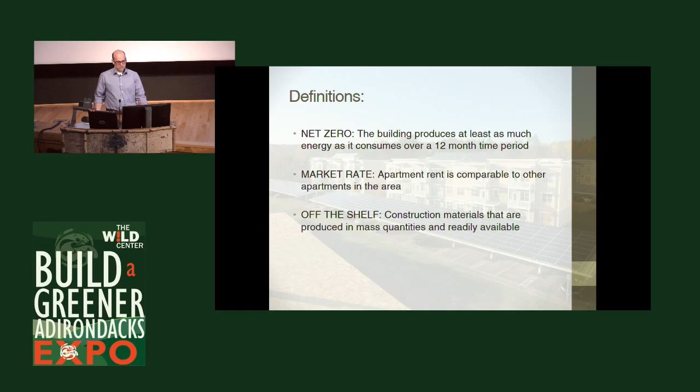So first of all, some of you likely know what these things are, but net zero simply is a building that produces at least as much energy as it consumes over a 12-month period. And that was one of the goals that we'll get to. Market rate is an important term too, because we talked about doing net zero 6 years ago when we did a single family home. Market rate means an apartment, which these are, rents comparable to other apartments in the area.

So if you're in the Schenectady area right now and you want to find a 1-bedroom or 2-bedroom apartment, you can rent at Net Zero Village, or you can rent at another apartment, the new development that went up last year. At Net Zero Village, all the utilities are included - you'll pay the same amount of money, so you're not paying a premium. Some people may choose to live there because it's a green project, but there's lots of people there that are just moving there because they'd rather live there than anywhere else, and it's market rate.

Another term, and I'm not sure this is actually an official term, is off the shelf. Most people know what that is, but it's really important for this presentation, because in order to achieve it, we needed to use construction materials that are produced in mass quantities and readily available. It drives the price down - when you start getting off into specialized areas, things get more expensive, more complicated.

So the first goal was from the developer, the client, David Bruns of Bruns Realty Group, who wanted to demonstrate that market rate, net zero multifamily development is commercially viable in the Northeast. So it's all good to be good for the environment, but if we can make money being good for the environment, now we're really getting somewhere.

And the team's goal was to create a successful and profitable development for the client, and also to develop a process that could be used on future projects, so that this can be replicated.

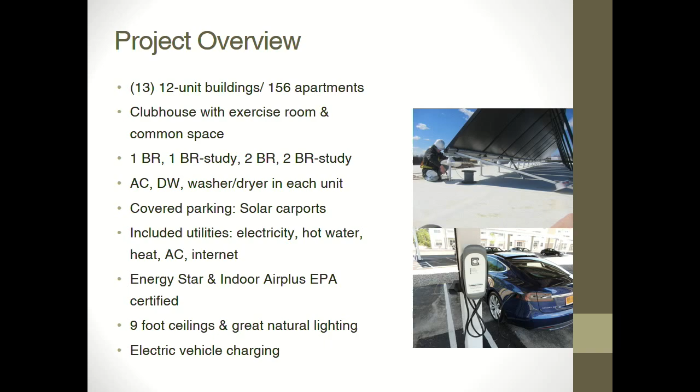The carports are actually where we're producing all of our power with the PV. And when you rent here, you get your electric, hot water, heat, air conditioning, and internet included - none of those bills. You just move in for one price, and that's part of the package. A lot of people like that, the simplicity of that situation. I would love that, personally.

It meets Energy Star and Indoor Air Plus standards. There's also something architecturally - I wasn't the architect on this, I worked with the architect Harris Sanders out of Albany, but they did a really great job. It has 9-foot ceilings, you'll see the daylighting which relates to energy, and there's electric vehicle charging.

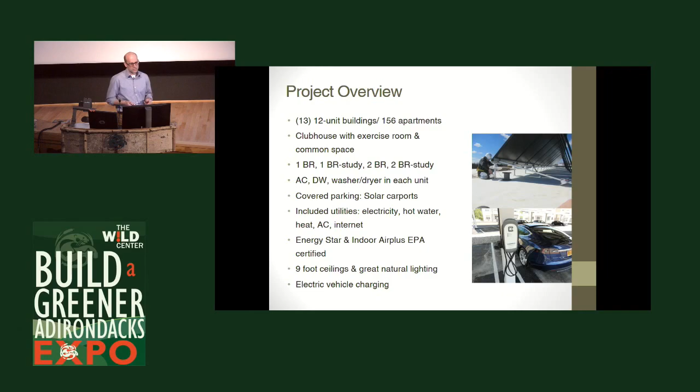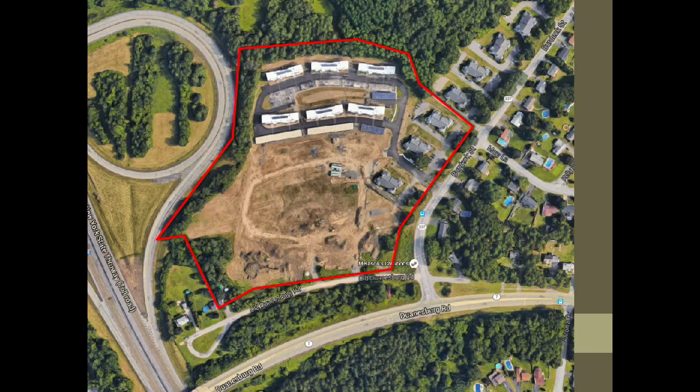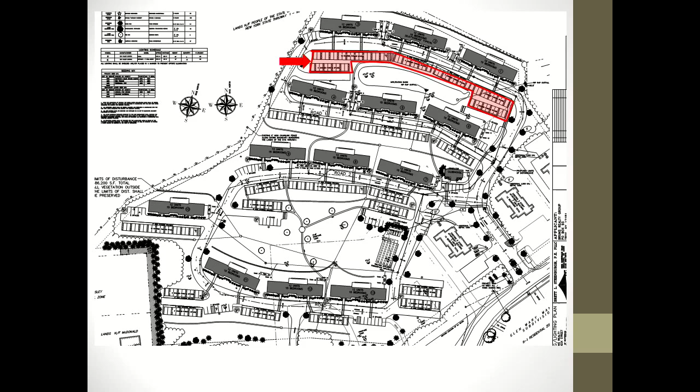This is the site plan. The last slide I showed was these 6 buildings, and you can see the carports, all covered with PV, which we'll get to. So all these areas here are carports and PV, which relates to the net zero aspect.

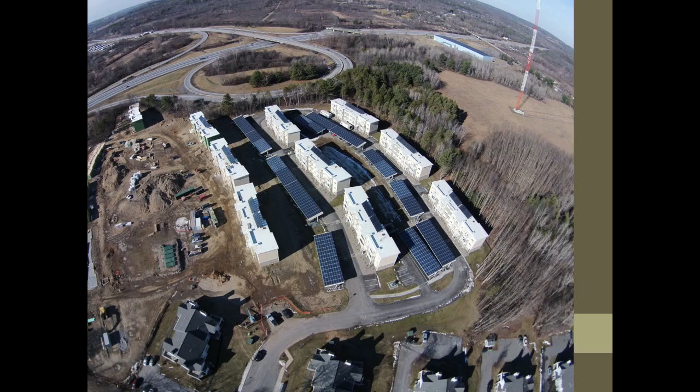Leave this slide up for just a second - you can see that interchange, and again, the first 6 buildings. This is 2 phases; the second phase is on the bottom of the screen, the first 3 buildings, and you can see 1 in the back. What's interesting about this slide is these buildings went up one after another - it started here, went to here, then there was a little lag, and we started here. You can see this one has panels and siding, this one doesn't, and this end is just a slab. So it's a completely different scale and approach than a single-family home.

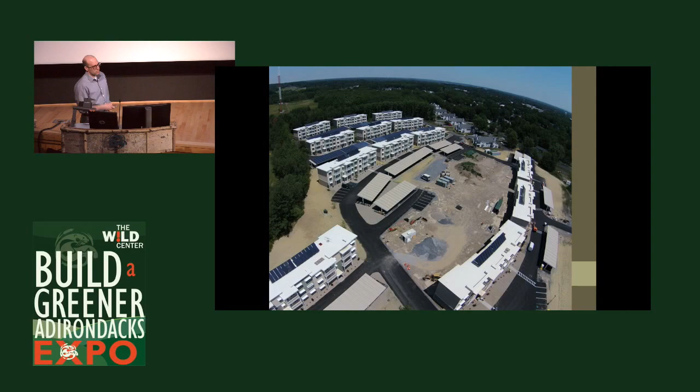A few more pictures - this is later on in the project, showing the whole thing. All the stormwater is handled on site here due to DEC regulations. I'll get into more specifics, but you can start to pick out the solar thermal panels on the roof, the PV on the carports, and some of the shading. This is facing south.

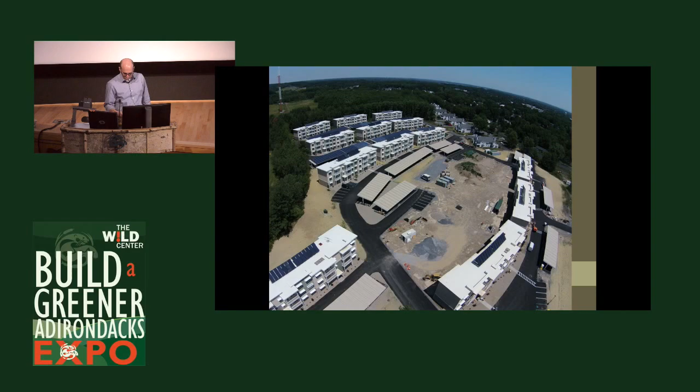Another picture here, as I'm going to zoom in - I'm going to start high and we're going to get into the apartments and start talking about some of those features. This, again, you can just start to see the character of the building development.

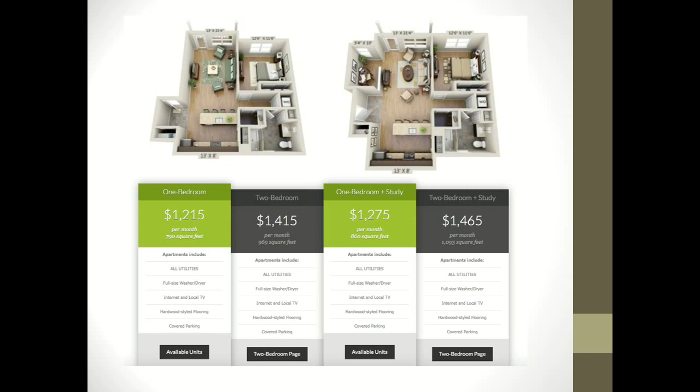So getting back to the market rate aspect, I'm not an expert in what it costs to rent in Schenectady, but this is off their website currently. So this is what it costs. I have one more blow up of these rooms, but this is kind of what you're providing for someone.

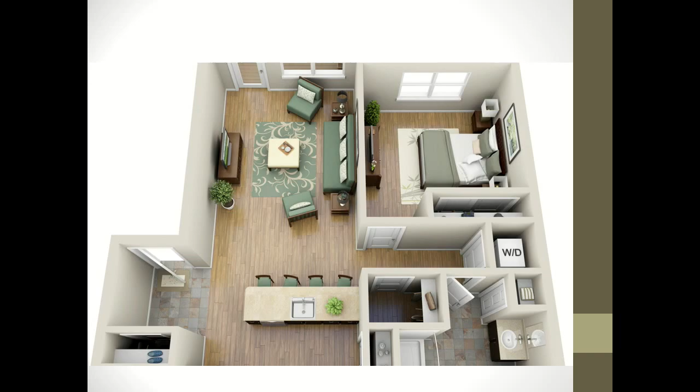This is a 3D rendering, and this way is south with the windows going this way. You have a living room, a bedroom, closet, washer dryer, sink, a peninsula kitchen, and a basic kitchen. I'm not going to show you all the units, but there's 2-bedrooms, 1-bedrooms, different versions. This is what we're doing for people at a mass scale.

One thing I've learned from this project is that when you get bigger, the dynamics change a little bit. Some of this stuff becomes less important at this scale, but we're working on a double-loaded corridor version of something like this. When you get into bigger, commercial buildings, it's really about air conditioning versus heat. This building doesn't hit that tipping point, but when you get a little bigger than this, you start to get there.

I mean, I could point to a couple features, but it doesn't look net zero. There's not necessarily—that's not the point. The point is that it is the rate that we're doing it.

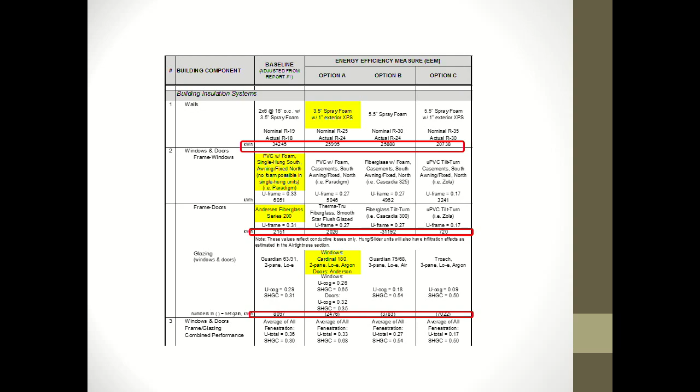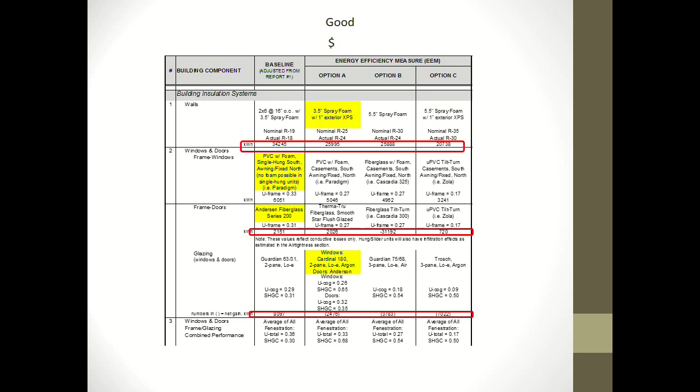So what we did is this Excel spreadsheet output—we went through good, better, best options. Don't strain your eyes on this, but you can see every aspect of the building, every aspect shown in kilowatts. For the walls, from this wall assembly, we determined we're going to have to provide 34,000 kilowatt hours. If we go to this one, 25,000, and down the line the contractor can price this and say, well, I can buy solar panels at this price—I'd rather buy a solar panel. So that was the real light bulb of this project, how to do this market rate.

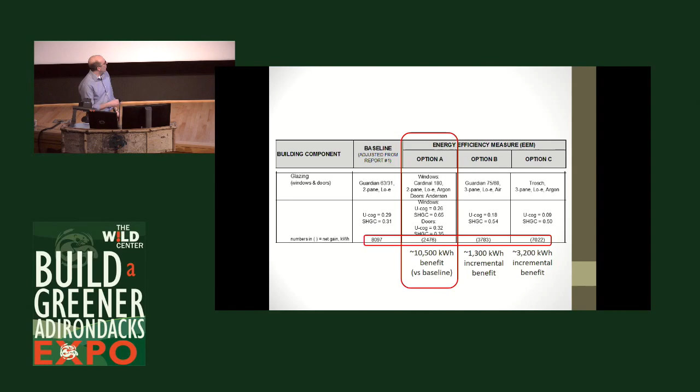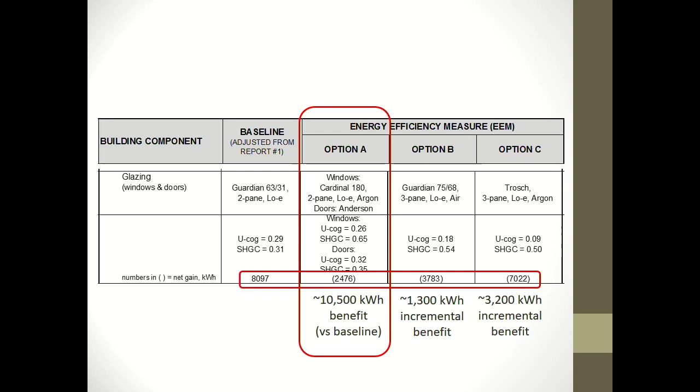We had to use real information to make informed decisions. Windows are another example. Going from this one to this one, you have a 10,000 kilowatt hour gain. Going further, the incremental savings get less and less, and you find the price point that makes sense, then we look at all the other issues that go into a building.

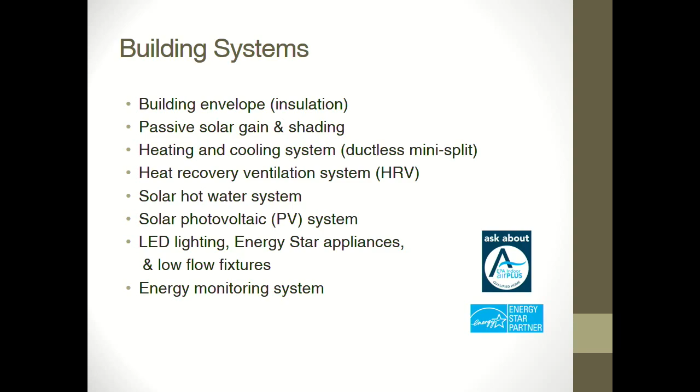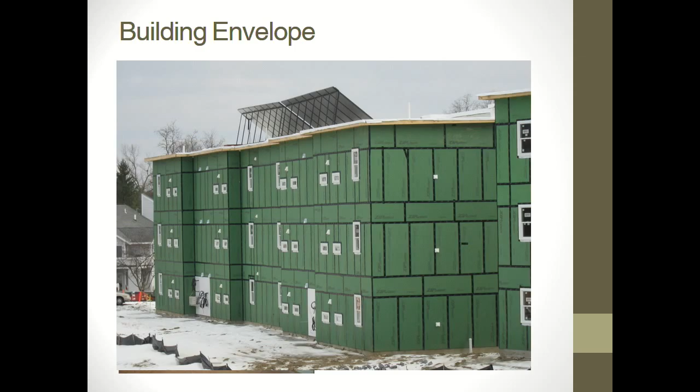I'm going to leave this slide up for just a minute. This is the north side of the building—you can see those kitchen windows for each of these apartments. And you notice the zip system, which you've probably all seen used around. What's nice—and the reason we used it on this project, again there's no good product or bad product, it's about when you apply it.

But really, the other thing about doing this market rate is, as an architect or designer, I get plenty of complicated details, and on a higher-end project there are reasons to do it and you can get it done. On this project we didn't want to scare the framing subcontractor or the insulator—it looks really different, not that it can't be done. On a high-end residential house, that can be done, but on this scale we had the subcontractors bid to the GC on construction costs. They needed to look at it and say, yeah, I've done 2x6 stud walls, that's what we do all the time. We don't put an inch of this foam plywood system on the outside, but I know how long it takes to put up a piece of plywood—it's just a different piece of plywood, not a big deal. So that's the approach we had to take through the whole building.

That gets into the off-the-shelf aspects of things.

Another thing to note on this—alright, laser—notice this detail up here, I'm going to get back to this. This building was extremely airtight, but you'll see some stuff with this detail at the roof.

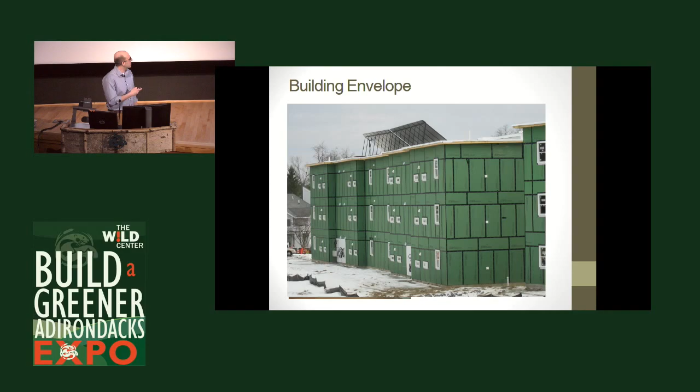This architectural drawing is long on the east-west axis. You can see the difference in the glazing from the south side to the north side.

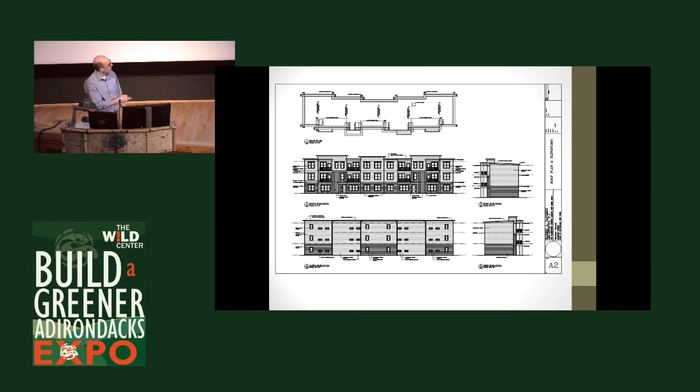This is the wall assembly detail, and you can see we're not doing anything crazy here. This is a code building, and that's where the economy of scale of the volume comes in. In the wall we're using the Zip system, which is an inch of polyiso with a thermal break for all the studs, and then we're putting closed cell foam in the wall. Under the slab we have 2 inches of XPS, a foam most houses have underneath their basement slab. In the roof we have 4 inches of rigid polyiso board, the kind every box store probably has. We can get into nuances of those wall assemblies, but we were meeting code. Code is changing, but we weren't doing anything really complicated with thick wall assemblies.

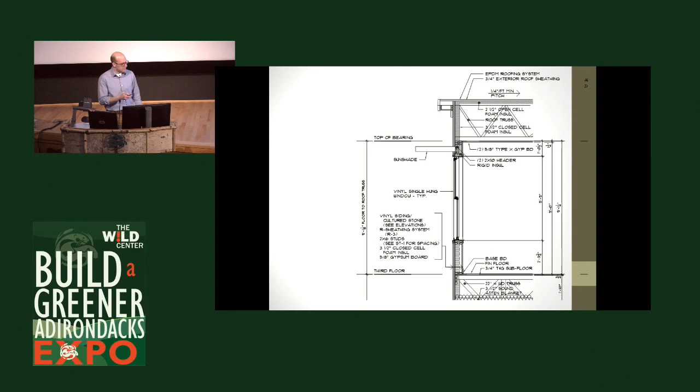So again, the air tightness and blower door test, we could talk more about that. I love this shot because you can see the sun coming in and heating this space during construction.

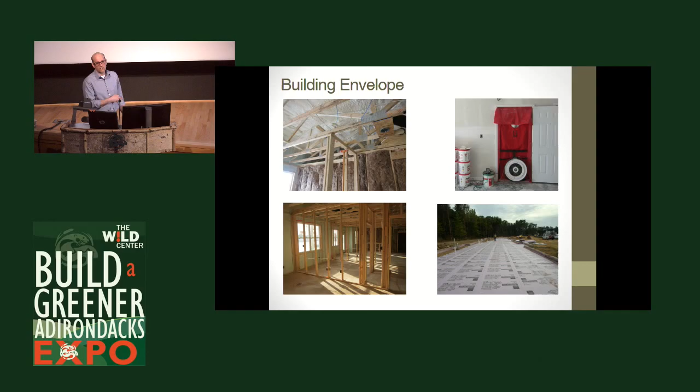That's an intentional mechanical system in the winter, and then we have to shade it in the summer. We need to shade it in the summer, or else it's going to be way too hot in the space. This is the 2 inches of foam underneath the slab.

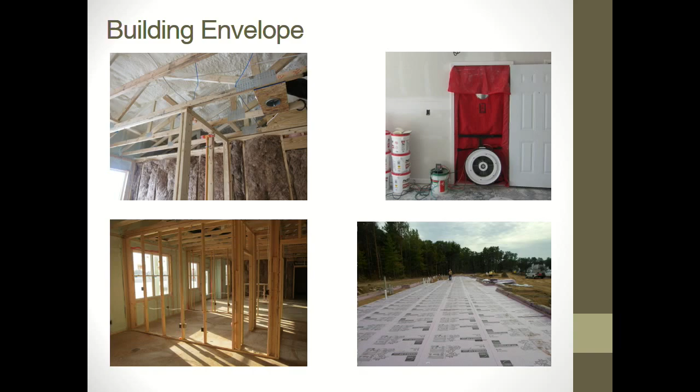Now the walls are up, and you can see that mechanical system coming in. For that to work, the glass has to be specified in a specific way.

This describes the winter sun and the summer sun. In a house like this, you often have an eave or an overhang. You'll see some pictures in a bit where we have some shading that gets into that a little more clearly.

This device is called a solar pathfinder, and it's a great tool. I often joke because it's expensive, a couple hundred dollars, and it feels like kind of cheap plastic. But you stand over it and look in, and it shows you if there's a pine tree by the corner of your house and you're wondering if it's going to block your solar panel or your deck or anything else. You look in and it shows you all that stuff.

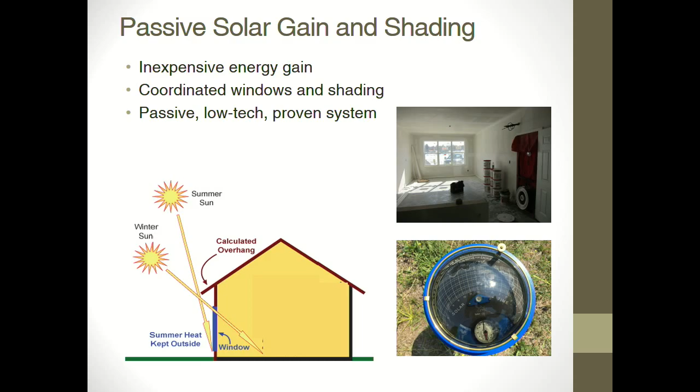So that's real. Understanding the site, both on the site level, the civil engineer laying this stuff out isn't used to worrying about whether stuff's in the shade or not, how close they put the buildings to the next property, and if the property line is east, west, north, or south.

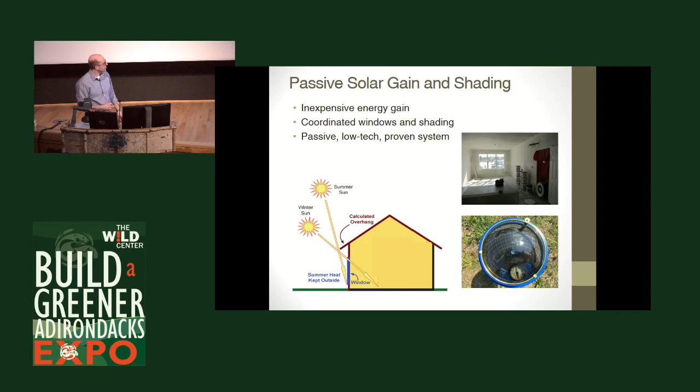The contractor's trying to keep us on budget. I don't want to buy solar panels, he said. I don't want to buy anything, he didn't want to buy. Anyway, I'm joking. I did, but it's fun. We all do our jobs, but we have fun doing it together.

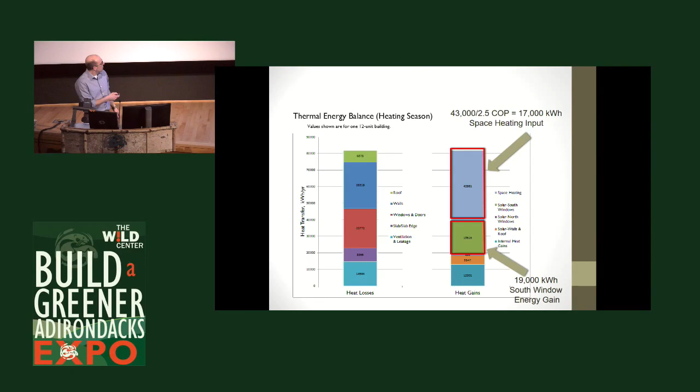Okay, so this gets to what I was just referring to, and this is amazing. This is where doing data at this level really blows your mind. In terms of kilowatt hours, we're getting 19,000 kilowatt hours predicted in this climate, in the model. That much energy is coming through those windows based on the glass we chose, that's letting the heat in.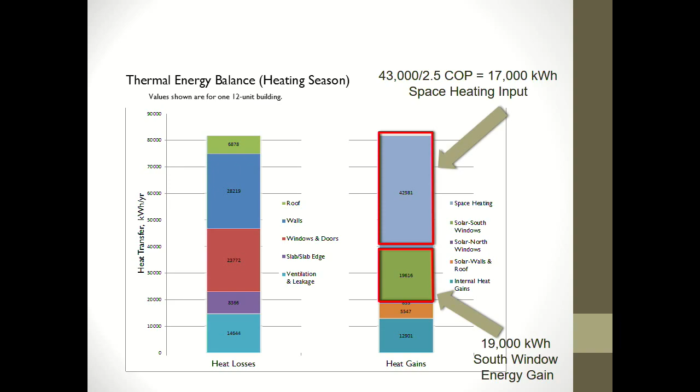Up here, the heating system needs to produce 43,000 kilowatt hours, more than double. But with the COP, the efficiency of the electric heat pump we're using, we're predicting in this building that we're putting in 17,000 through electricity to heat it, and we're getting 19,000 from the sun. I wouldn't have expected that, but it's great. We'll take it.

And the way we do that is this ductless mini split. We'll get into some of the appliances, but you can see that's what's heating every apartment. And again, it works down to 15 below. We have electric resistance backup. We're providing fresh air, which is an upcoming slide here. But again, it's an apartment.

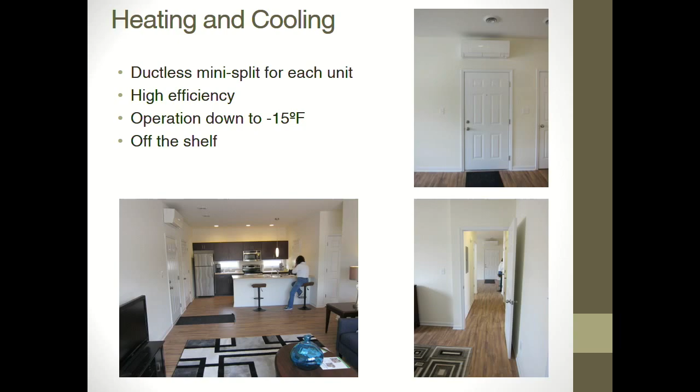This is the back of the apartment. This is what a mini split looks like. Every apartment got its very own single one. We looked at all sorts of options, but every apartment got one.

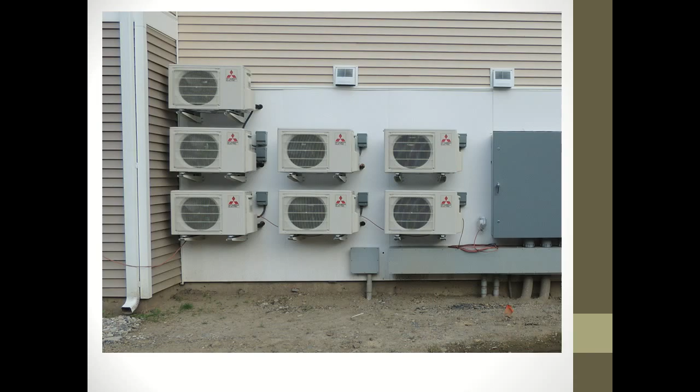Another side story, if we have time at the end I'm happy to talk about any of this stuff in more detail. But budget-wise, you'd like a head in your bedroom, one in the bathroom, one in every room, right? The contractors like to keep on budget.

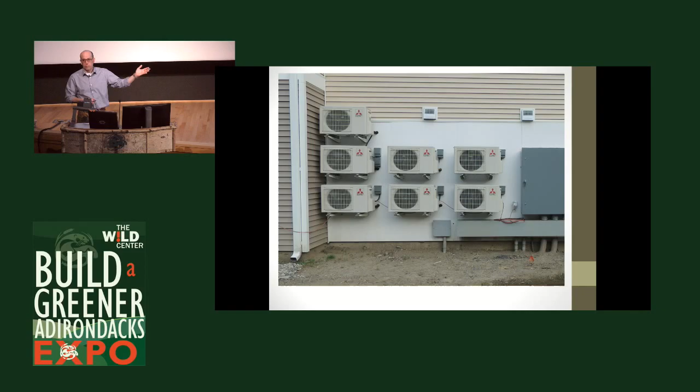I want one. So we ended up using a transfer fan to move the air from the living room into the bedroom, and there's a lot of research behind that. This is where it gets really fun with a client like this, because I'm not saying you can spend money and do this and this and it's no problem. I let them know about the risks, like are you going to have occupant complaints where it's not warm enough in the bedroom? This helps them manage those risks, and we did, and it's been great, no problems. But you have to make those type of decisions when you're on the cusp of doing something new.

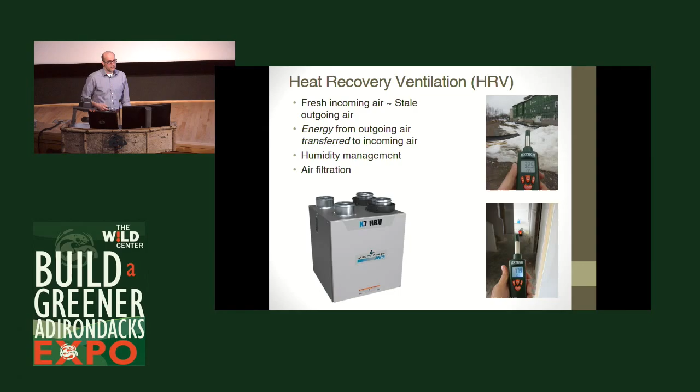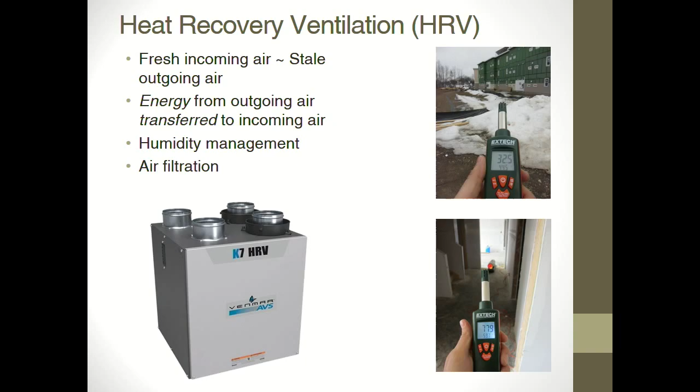Ventilation. You have to do this in a tight building, and it all gets down to humidity, which is measured with a moisture meter—I don't know where it is, I lost it, if anyone sees it let me know, I'll buy another one. But anyway, that's not the point of today. You've got to manage air, get fresh air in. You have to transfer the heat if you're working to get all this energy, so you're not wasting it going out. Humidity management, and you can filter the air, getting better air quality than you would have in a traditional home.

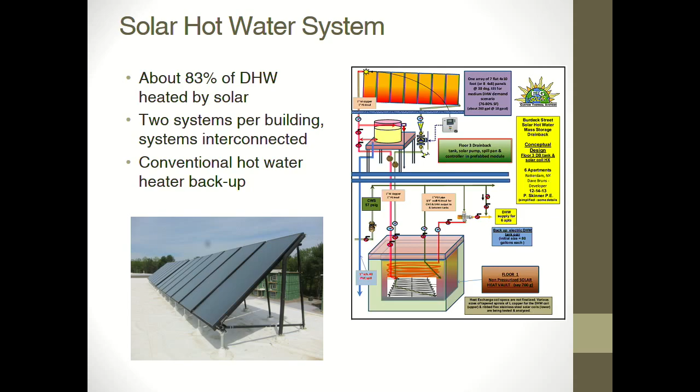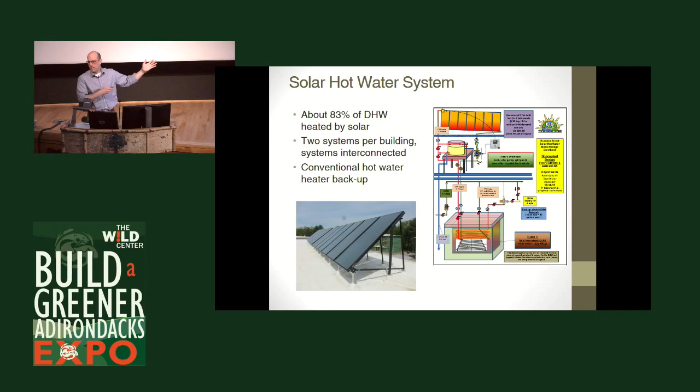Another way we did this was through a program that seems to be loose now—other people in this room probably know more than I do about it—but at the time, they were incentivizing solar thermal. So right now, 83% of the hot water used in this apartment is produced from these arrays on the roof. Pete Skinner of E2G Solar designed it, installed it, and it's working great. It has an electric resistance backup, so 20% of the heat is backup in November. It's been unbelievable. So the next project Pete is doing uses fewer panels, because we realized we can make 83%, but what does the system cost? Let's optimize it—use 70%, save a lot of money, and figure out how to do it better every time.

PV. Every building on the carports has a 66 kW system, which is larger than we need, which is a good thing. But I don't want to get to the end of the punchline—that's my punchline at the end, that we did it. So I'm not trying to spoil it, but yeah, it's a big system. The reason we did it is because we made the building so airtight, and the metric there is air changes per hour.

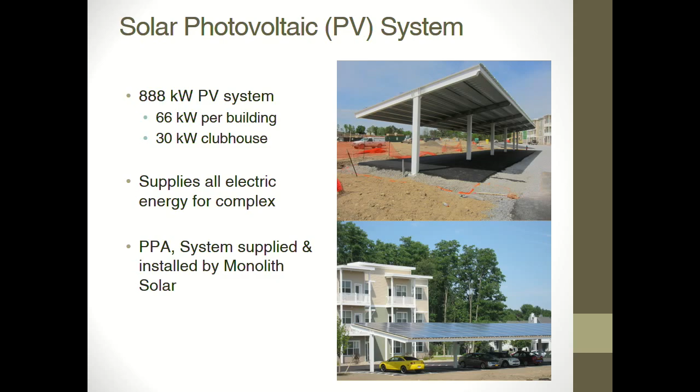I don't know what code is exactly for this building. Maybe it was 7 before, and now it's 4 air changes per hour. It has to meet code. So I said, I know we can do this building at 2. I've done houses that are well below 1, but we're running it through the trades. This isn't a custom home, high-end contractor. Money is the object, but we can do that. End of the day, that's a huge lever.

That's the biggest lever on any energy efficiency, is not having your windows open. If you have your windows open, who cares what kind of furnace you have or what kind of insulation you have in your walls? If you don't have a building airtight, that's exactly what you're doing.

Part of the reason solar is relatively cheap, that's one thing compared to a lot of other things when push came to shove. Also, because we got the building so much tighter than we were willing to bank on, we just ended up not needing as much solar as we needed.

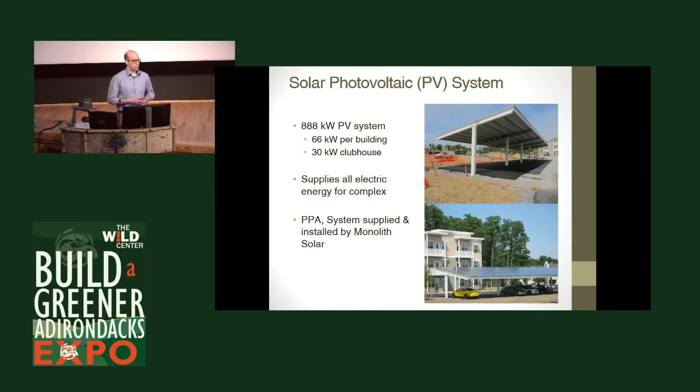Now, you can't just buy solar. This is all funded through NYSERDA, the low-rise program, and they have thresholds through the HERS rating. It has to be pre-PV 50, post-PV 10. I won't get into that, but you can't just solve everything by buying a lot of solar panels.

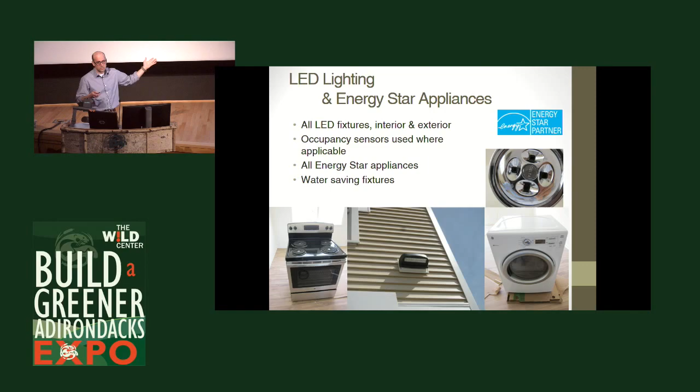Energy Star appliances, LED fixtures - what we did is we just went through the Energy Star website and looked at all the Energy Star appliances, and we picked ones that were off the shelf, nothing fancy, but we still picked ones that use less energy, and put those into the program. Each apartment gets monitored for energy, and I'm not going to get too much into the whole monitoring system, but we did a lot of analysis we're still processing.

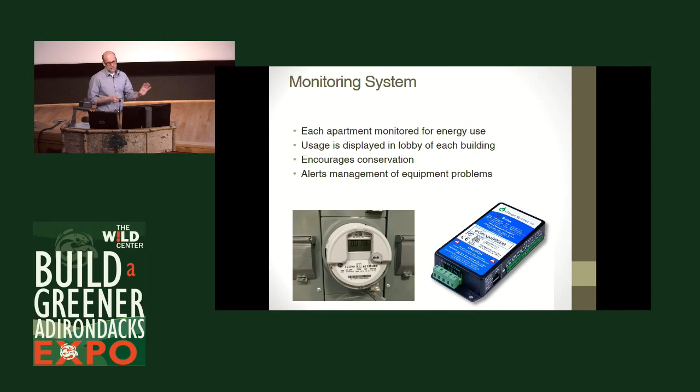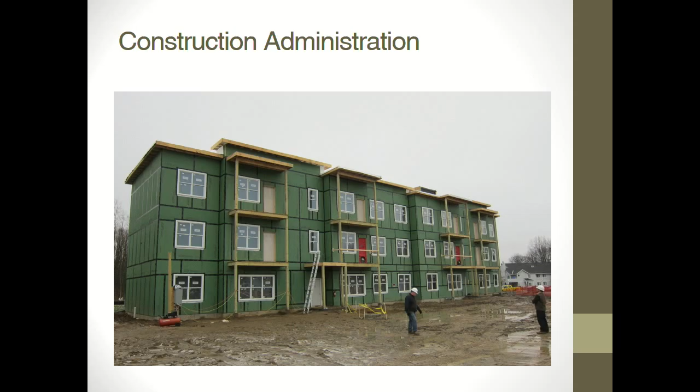So I'm going to talk about construction administration, which is basically what designers do when they're not building it - when someone else is building it. I do a lot of explaining this to people, and when you're doing a project in design or construction, especially when someone's doing a house for the first time, this is a whole new world, it's all new language, we need to communicate it. Construction administration is, you can have this all great on paper, but then what happens when it actually gets built?

So this photo shows the 2 blower doors. There's 6 apartments on this - this is the entry for 6 apartments - and we have 2 blower doors set up to test it.

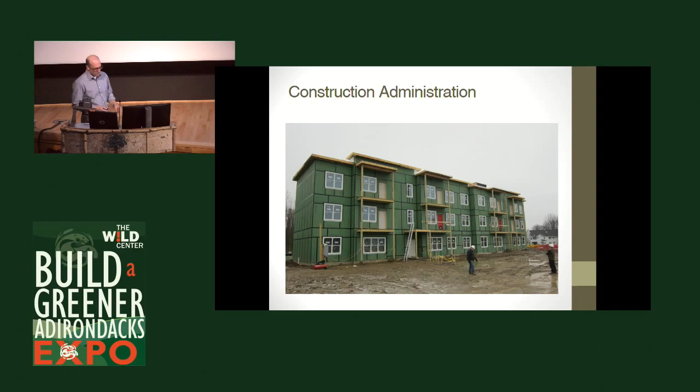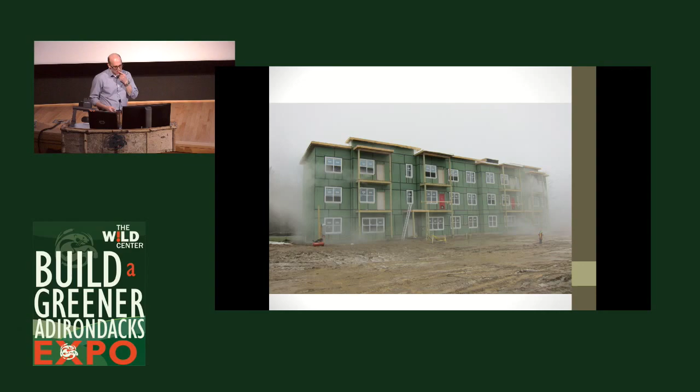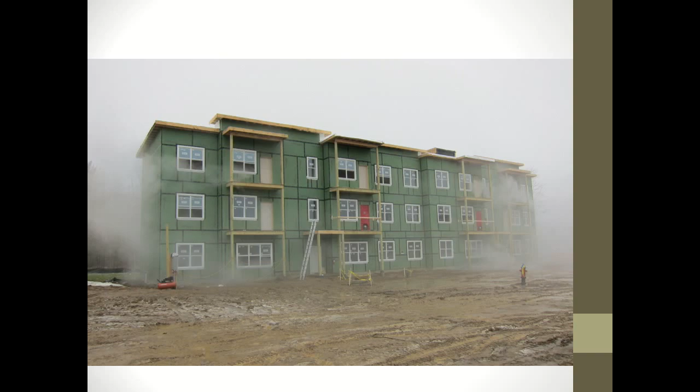Now, this is a smoke test. In full disclosure, this is after the test when I was trying to air the building out. We only did this on the first building. What this is, is theatrical fog - we fill up the building with fog, and then pressurize it with a blower door.

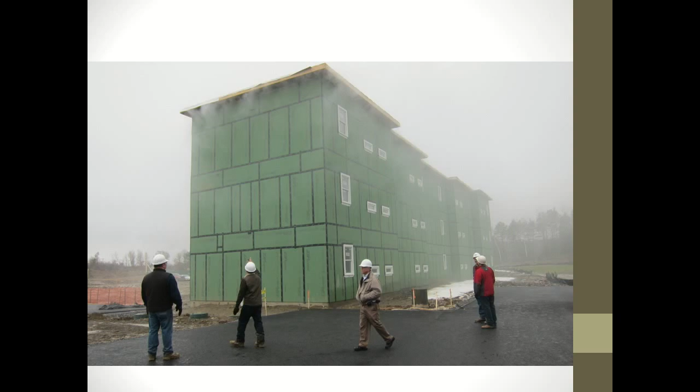So we're not trying to figure out how airtight it is. At this point, there's no spray foam in this building. This is just - I wanted to test the building with the green and the black - and anyway, this is what it actually looked like, and that's the detail I was talking about earlier.

So there's no stuff coming out of here. These windows were Paradigm windows, single hung. I was really skeptical - like, more of a high-end residential, casements, awnings close better, all this. We ended up with a really good quality vinyl window, and I've tested triple pane windows from Europe that who knows how much they cost, and I've seen smoke pouring out the corners. Not pouring, sorry, that's a bit of an overstatement, but I've seen smoke coming out the corners. Nothing on these windows.

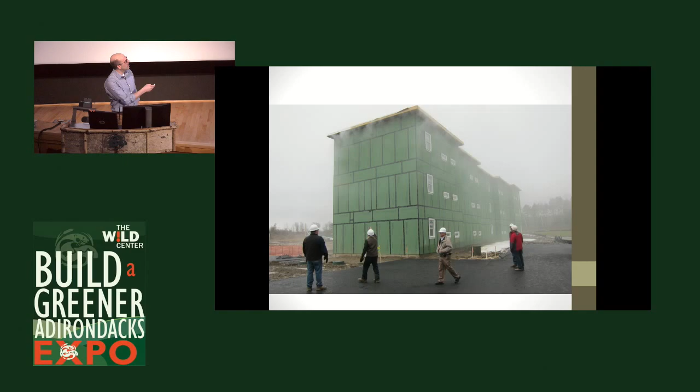And nothing here, but you see the membrane on the roof and here, and there's a gap. So from the inside, that's what the gap looks like. Eventually you're going to spray foam your wall, and spray underneath the roof and this.

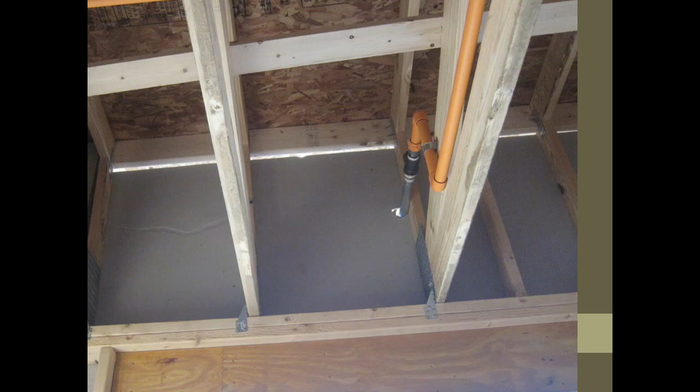So the idea here is that you think if you spray foam it, it's airtight. It's true - incidentally, if you just spray foam a house, it does make it more airtight, if you're not paying attention to anything, it does have that effect. But the theory here is we're not depending, except for right here, on spray foam to be the airtightness. That's the other stuff - you can put a batt in, you can put cellulose, you can put spray foam, whatever you want. But I've seen this over and over.

When we get to the end, you'll see some airtightness. This is still the biggest leak in the building - it's very small, but this is all spray foamed. It looks like nothing could ever go through it. I've seen this on several projects - air goes around spray foam, but it only matters at this level when you're really getting to the fine grain. If you're not, in general, it does a great job.

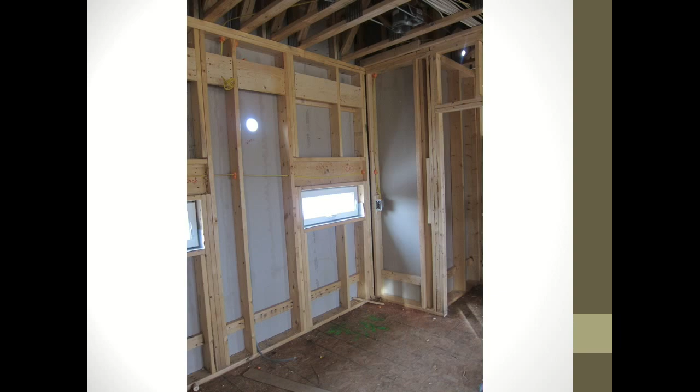Can anyone see what's wrong with this picture? It's minor, but I just want to take a moment to turn it back on you. It's sort of a minor thing, but well, that's true, and I tried really hard to get rid of that.

I tried to get every stick of framing out of here, and again, this isn't a custom home. I took this inner stud here out, and it was like they did end nailing because it was like you didn't need to. It wasn't a big deal. This is not a custom home.

It's getting run through the trades in Albany, mass produced, and the quality of the work - I mean, some of those sills were like you had to, it was like becoming a problem. Not like this - again, I catch myself exaggerating, but enough that it wasn't acceptable tolerances. So the contractor's like, listen, I got this, to get this on price, I need this framer to do it. This is the skill level of this framer.

And if I don't have these in there, they don't cut to that, I can't - and you're doing, it's 156 units, it's just mass produced, going through. I can't get the job done.

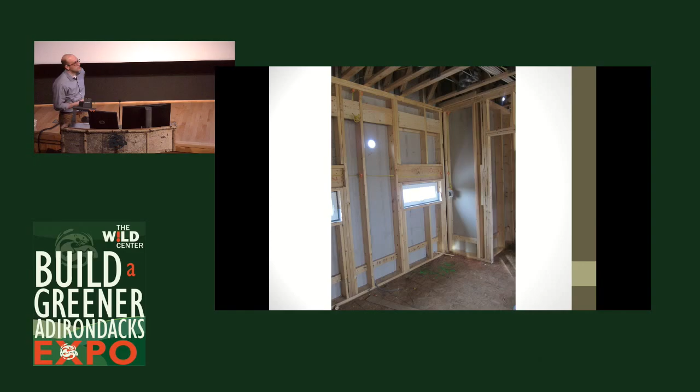So again, all of this comes down to what do we have time to care about? And I agree, like I don't want to waste anything, but there's lots of the wood - yeah, I pushed on the wood and I had to push a lot on a lot of things, so I picked my battles. And I mean, one thing you could actually do is joist, roof joist. Yep, it would eliminate a lot of lumber.

Yeah, no, you're right. So I'm going to keep moving here and make sure it's time for questions and get back to any of this.

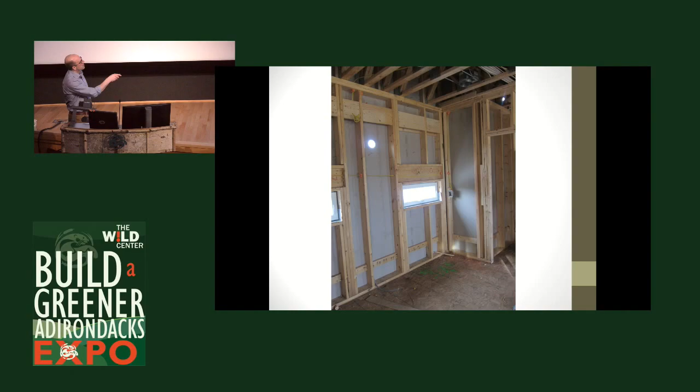But no, so during construction like this, you can't - there's a void behind that, you can't get to that to insulate it. And again, is that going to sink the project? No. But if you do that 156 times and you do it on both sides, not so much that, but also there could be - you need to keep everything warm, there could be a dew point, it could be condensation, as much as it's using more energy. There's all sorts of things.

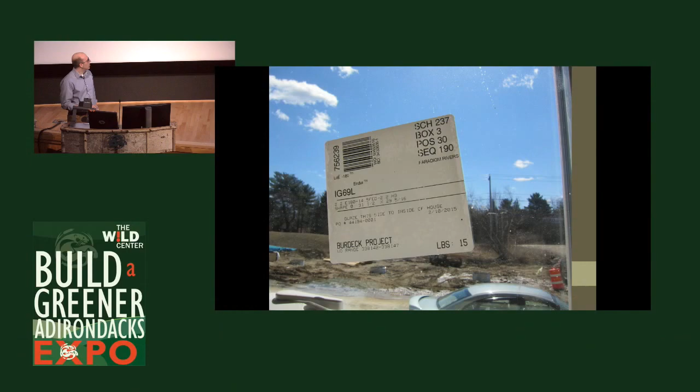So during construction, you walk around, you keep an eye on this stuff, and just make sure that everything is actually going to plan. Did they deliver the right windows that were called out? Did they show up with the right spray foam that was called out?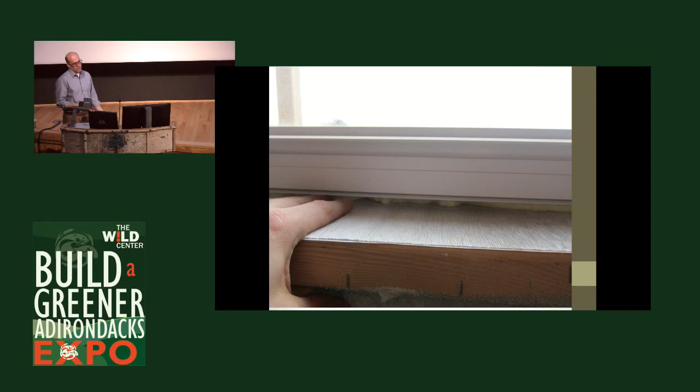You can call and say, did you foam around the windows? Yep. But then you go in here, and that's supposed to be filled, and I could see daylight. And again, this was on, I don't know if it was building 1 or 2 or 3, but at a certain point there's 13 buildings. I walked down, go down once a month, I saw this, and in time they redid it, and again, they knew that for the next building - yeah, we can't not do that properly. And it wasn't that someone was trying to get away with something, they just don't know, they might not know how critical that is.

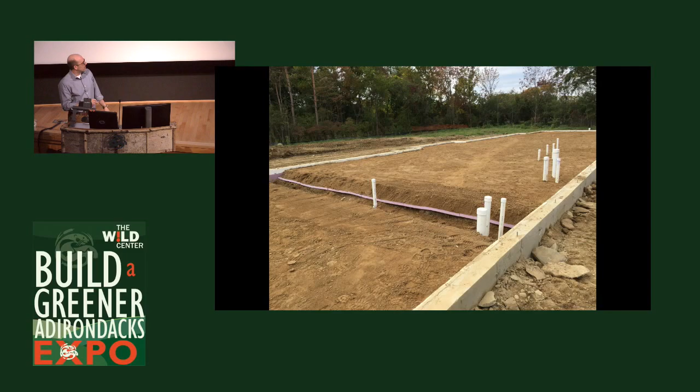The slab, again, you see the 2 inches of foam, and honestly this isn't even normal on a commercial building to put 2 inches of foam under the slab. They don't bother, they just put some plastic down. It's better to have insulation in the wall, where up here it's 20 below, than the ground which is 40, 50 degrees. It makes sense. But that's the type of stuff we had to do, continuous up to here and up the walls. This was an important aspect during construction, and in theory, this is how this project is going to perform.

Again, this was what came out of our report. Every month you can see the solar - obviously in the summer you're producing more, using more in the winter. So that's the concept of net zero: over the year this all balances out, and you're producing as much as you consume.

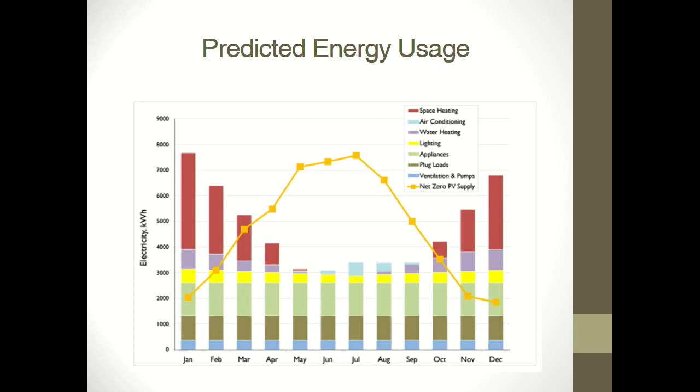I believe this is one building, yes. Every apartment is metered, and the common areas are metered by utility meter. And then we have e-gauge for all apartments. But all that data, I'll get to how conclusively we are net zero and where things are at.

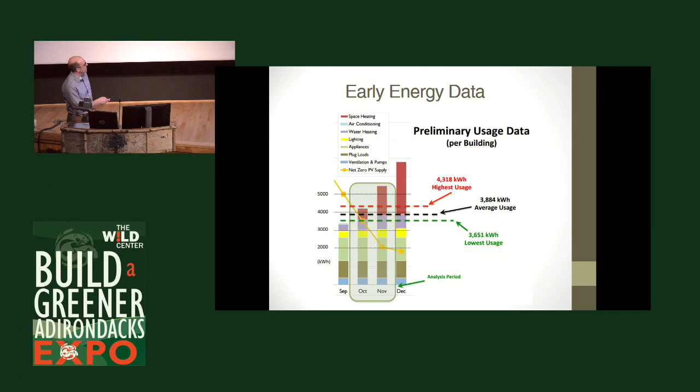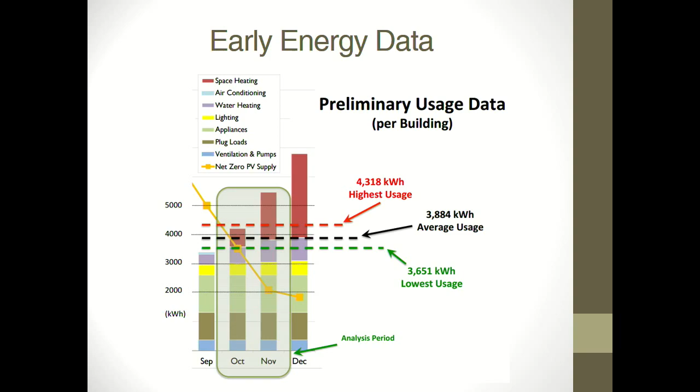All those bills just go - right, so this is just an early thing. This is last year, the first couple months. But just looking at the first couple months, this is what we predicted, and this is a high user, and this is where we are. We're like, wow, this is really starting to track once we get the first couple months. Now this isn't a full year, this isn't multiple years, but it starts to show we're getting some preliminary data that we were on track.

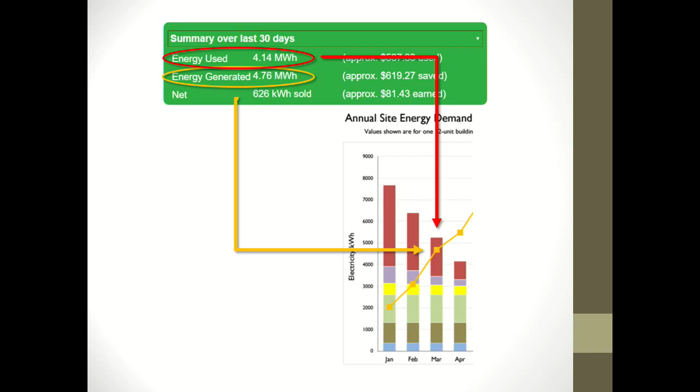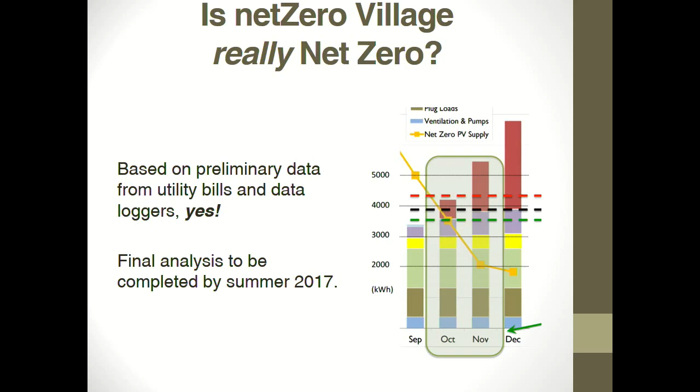This again just shows for that month - yeah, look, it's kind of looking like it's net zero. We're producing what we predict, more, and in a given month it seems to be in range. By August we'll have the official data. Taitem Engineering out of Ithaca is hired by NYSERDA - there's a program to fully monitor and give feedback on this building. But all signs are looking positive. We're overproducing, and it's good to go. We don't have the official data at this point.

What I can tell you is it appears our predictions seem to be plus or minus 5% of what we predicted. So what we predicted for usage, based on this passive house model and a good person who knows what they're doing with it, is we're right on top - I mean, that we know. We're predicting how much we were going to use, and we are using very close to that amount. And then we know we have a very oversized PV system. So that's why we've got to get the final word - it's not official. So I'm not saying that we did it, but I did say yes because I'm pretty confident.

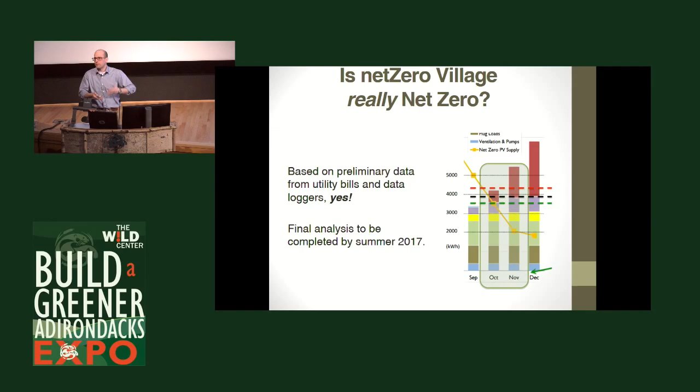But we'll know soon enough. In the next month or so we're going to have results extrapolated for a year where half the building was fully occupied, and then when they came online - you saw the construction, like when the building got filled up - you have to extrapolate because it wasn't truly filled up for a whole year. But by the end of the summer we'll have all that data, and it's looking good.

So, project overview: it's the first large-scale market rate net zero multifamily project in the country. And I keep saying this, I couldn't find any precedents - if anyone knows anything, let me know. But for everyone I've talked to, it hasn't been done, which I'm really proud of. It's really what we've been able to do through this team, and what I've described is new, and that feels really good.

The building design was based on optimizing every piece of component. It's off-the-shelf materials.

It was completed already in 2016. And the other thing is we're currently with the same team in schematic design with the next project, still in Schenectady. Down the road it's going to be 256 units, net zero, and we're applying all this information to the next one. We're hoping to break ground at the end of this year, and we're currently on track to do that for phase one, which would be three 24-unit buildings. That one is similar to this, but it's a double-loaded corridor where half of it's facing north, and that's what I was alluding to earlier.